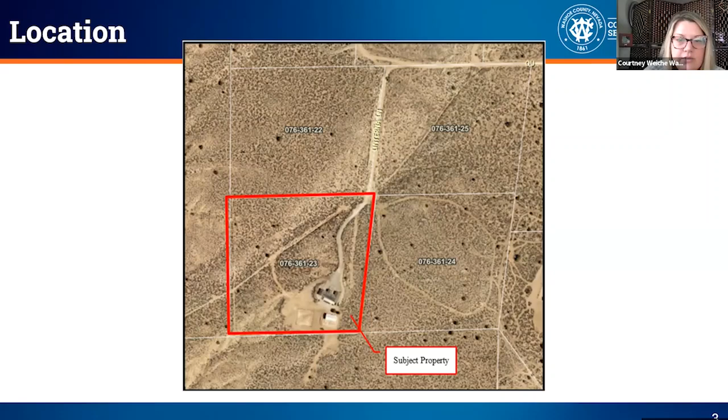The subject property is generally flat. Adjoining lots are developed with single-family dwellings and contain several similar accessory buildings. Existing and proposed development on the subject parcel is consistent with the development in the surrounding area. As shown on the site plan, the proposed location meets all applicable setbacks of the general rural regulatory zone and defensible space requirements. I actually already went over that, so I'll skip that part.

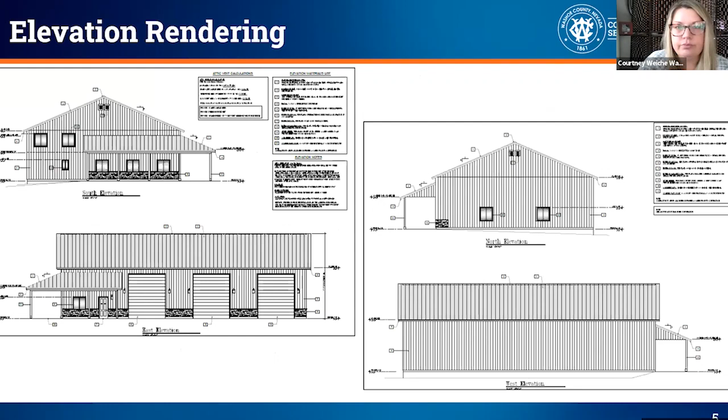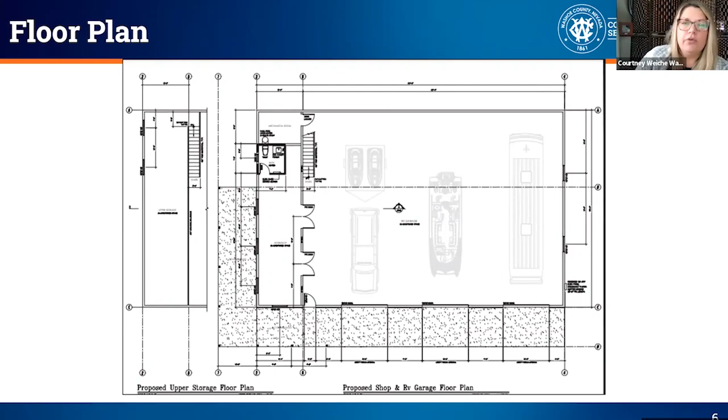The proposed structure will be stick built with metal siding and have stone veneer accents on the lower portion of the structure's perimeter. The metal siding is required to be non-reflective per condition 1F of the conditions of approval. The structure has a maximum height of 27 feet and is within the maximum height allowance. The floor plan includes a small covered patio, a mechanical room, half bathroom, an upper level mezzanine storage area, and a main floor for RV, boat, and storage space.

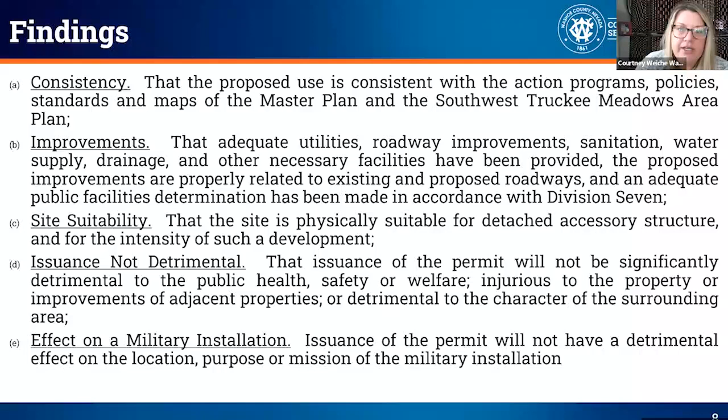All appropriate noticing was followed. 36 properties were notified of the application. No comments were received either for or in opposition. All applicable agencies also reviewed the request and provided no opposition. We only had one agency, Truckee Meadows Fire Protection District, that provided conditions of approval, which indicated that the structure must comply with all applicable fire codes. Staff believes all required findings for approval can be made, and I have provided a motion for your consideration. That concludes my presentation, and I am happy to answer any questions.

Thank you. Are there any questions for staff? Within the actual documentation, page 19, Exhibit B, attached is NRS 534-180, which states that approval for that use or purpose must be obtained from the local governing body or planning commission in whose jurisdiction the well is located. Does that mean this has to go before the planning commission, or can we handle it here? No, that's a statutory requirement, but typically the planning commission grants the authority to approve to the appropriate governing agency, so it would not need to go before the planning commission. Okay, thank you for clarifying that.

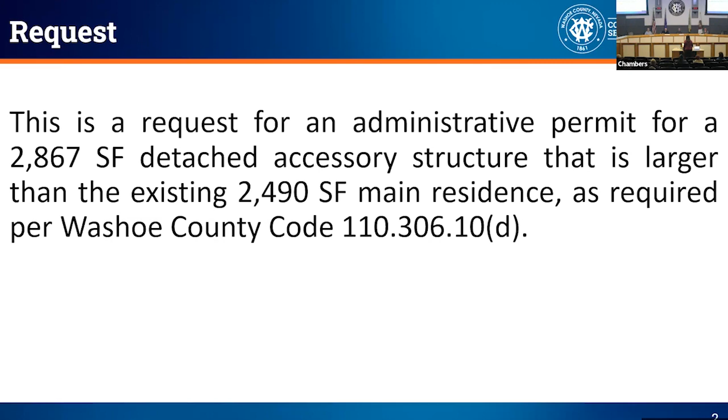So this is a request for administrative permit similar to the previous one you heard. This is for a 2,867 square foot detached accessory structure that's larger than the main structure, which is 2,490 square feet. And it's located out off of Red Rock Road. You can see where Red Rock Road is, and then you can see a closer view of the property.

So the parcel, as the previous one, is zoned GR, but it's only a 12-acre parcel, which makes it fall under the low density rural requirements. They have a setback of 30 feet in the front and rear, and 50 feet on the sides. The structure will meet that.

Also, the structure is only going to be 18 feet and 7.5 inches, which meets the height requirement of LDR. And then concerning the lot coverage, it will meet the requirement, which is either 80,000 square feet or 10% of the lot, so it's going to be considerably under that.

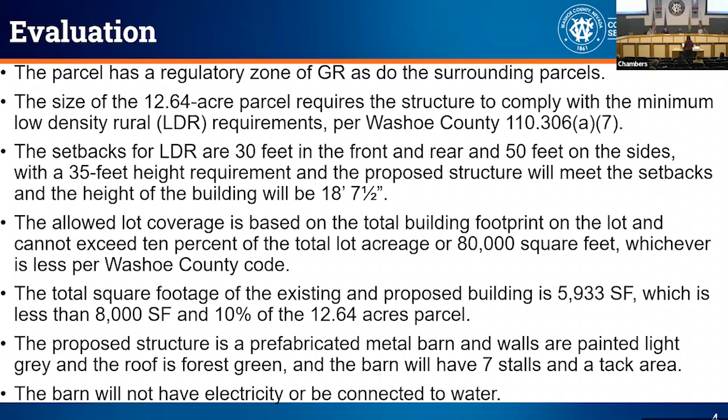The proposed structure is a prefab metal barn. The walls will be painted light gray and the roof is forest green. The barn will have 7 stalls and a tack area. The barn will not have electricity or be connected to water.

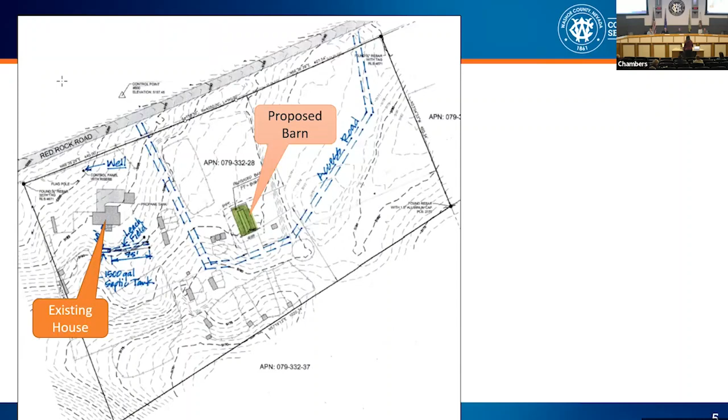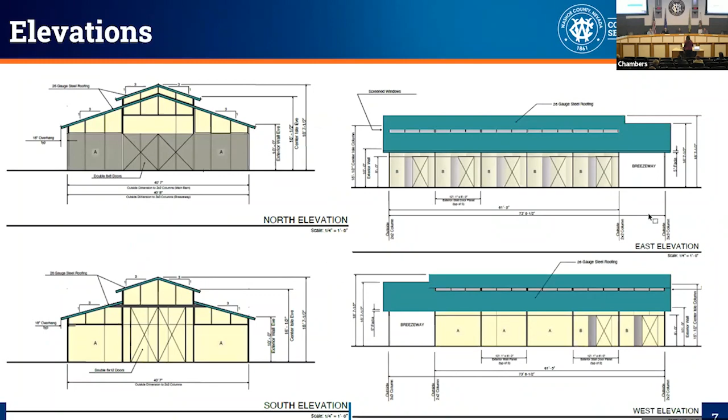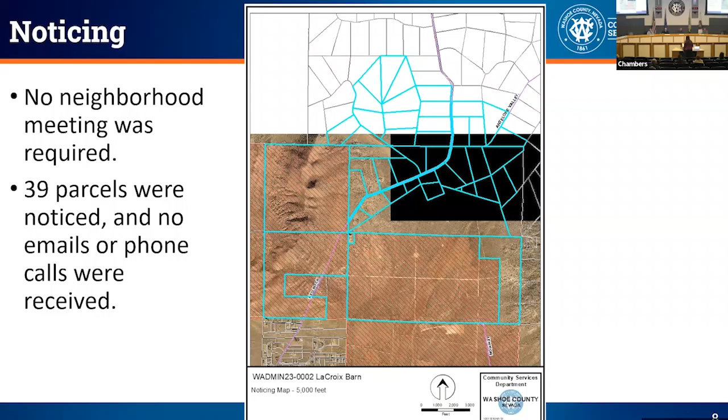There was no neighborhood meeting required. 39 parcels were noticed, and I didn't receive any phone calls or emails. This was routed to various departments and agencies, and those comments are included in your conditions of approval. Staff is able to make all the findings, and I provide a possible motion, and I'm available for any questions.

Thank you. Is there any questions for staff?

Mr. Stanley: Mr. Chair, Planner Olander, I'm going to ask the same question that was asked by one of the neighbors earlier and that we asked the last applicant as well. Do we know whether this is a private or commercial endeavor, or any contemplation of it becoming commercial? Staff: At this point, as far as they've presented, it's private. They are only to house their own horses on the property.

Thank you. Are there any more questions for staff? Commissioner: Mr. Chair, I have one question for Ms. Olander. Were there any comments or objections posed by the neighbors when they were sent their mailing? Staff: I did not receive any emails or phone calls. Very good, thank you.

Ms. Julian: I have a query. I think the table on page 7 needs to be updated for the actual comments, because I believe there are conditions from the environmental health agency that are not reflected there. Can you look into that? I don't see any X's there, but they did respond with some conditions.

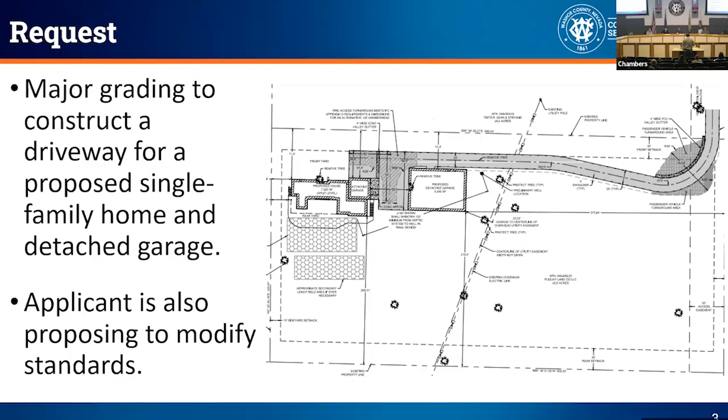Before you is provided a site map. The request is for major grading to construct a driveway for a proposed single family home and detached garage. The applicant, as part of the request, is requesting to modify a single grading standard. I want to highlight 2 things associated with this site plan. To the far right along the property line where the driveway starts, they've provided a decent amount of turnaround space, acting almost like a cul-de-sac type turnaround for anybody who comes down that driveway.

The additional item is between the proposed residence and the proposed detached garage. They are providing a large paved area that is part of fire's required conditions. And so I want to note those specifically because it does impact the proposed grading and the proposed design.

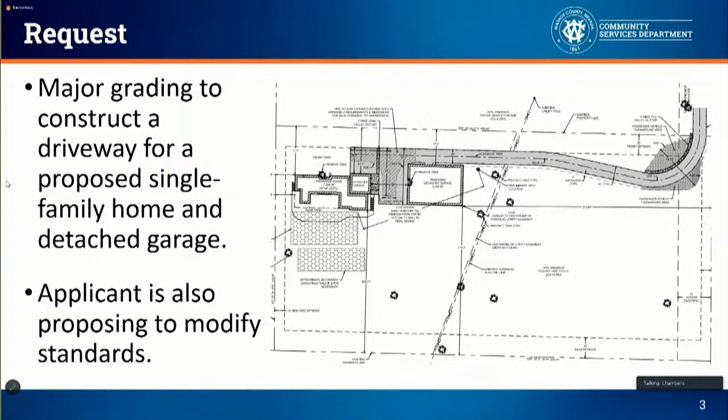So the request associated with it, the 3 triggers are the importation of 1,000 cubic yards on sites that are 15% or greater in slope, a driveway that traverses 30% or greater slope, and then grading to construct a permanent earthen structure greater than 4.5 feet within the front yard setback. The overall quantities that were proposed are 970 cubic yards of cut, 1,250 cubic yards of fill, with 1.75 acres of disturbance.

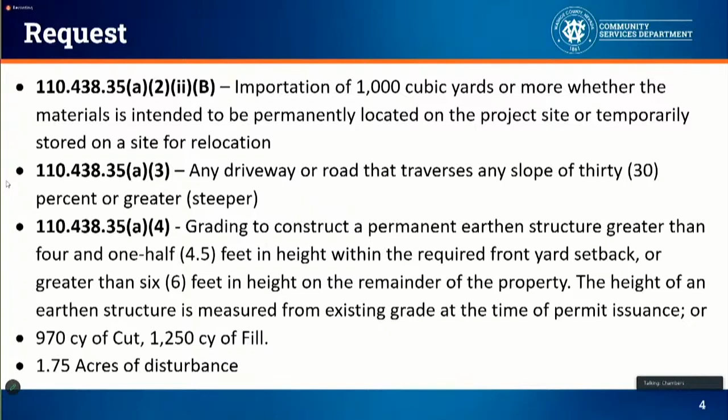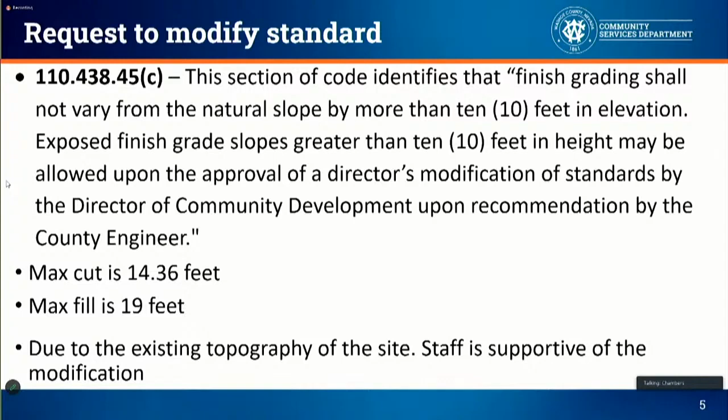The request to modify a standard is specific to 438-45C. This is relatively common to see requested to be modified. The code limits the max difference from natural slope to be no greater than 10 feet. In this case, the max cut that they are proposing is 14.3 feet and the max fill is 19 feet. Due to the existing topography of the site, staff does support this requested modification.

Staff did go to the site for a site visit last year, and upon going to the site, it was witnessed that the applicant had conducted unpermitted grading. So the unpermitted grading, as you can see, is in the outline above the dashed lines and the primary driveway cut. The original intent and the reason why this unpermitted grading took place was for the applicant, the property owner, to conduct perc tests and leach field trench tests. While the grading associated with the leach field test and the perc test is exempt under Article 438, the grading to get access to this location is not.

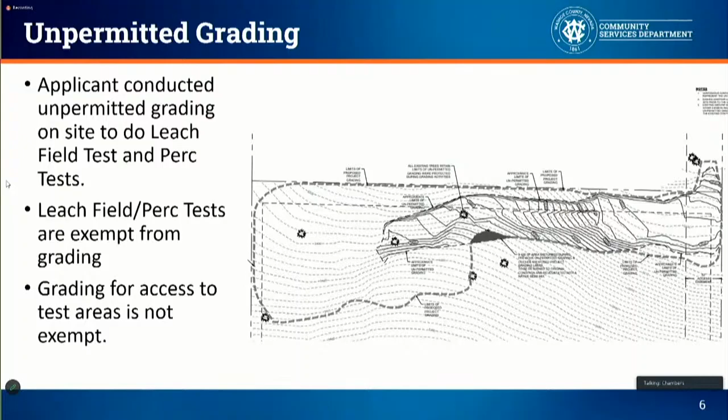When staff found out about the unpermitted grading, we requested the applicant go back, modify their request, address the unpermitted grading, add the additional cut and fill that they did, and resubmit. The applicant did exactly that, but I want to note that while the grading originally was unpermitted, it did ultimately follow the proposed driveway that is before you. So part of this grading permit is to also rectify that unpermitted grading.

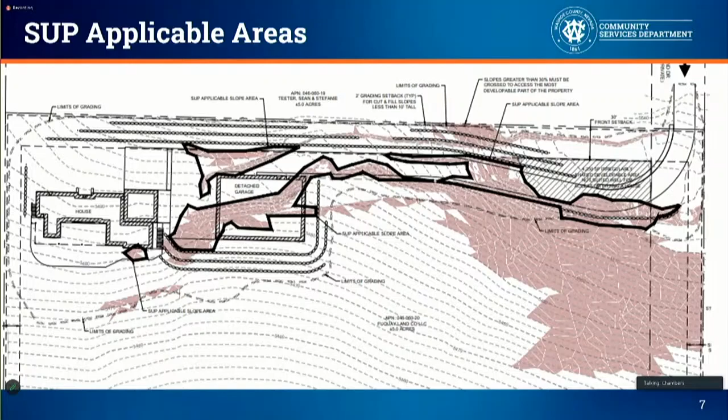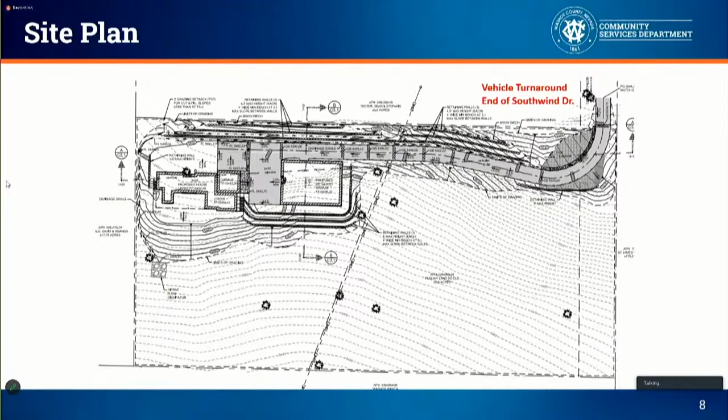Within the South Valleys area plan, there is a specific area plan policy that is required to meet all the findings for a special use permit approval. And that finding is specifically South Valleys 2.16, which states that there must be a finding included that the community character, as described in the character statement, can be adequately conserved through mitigation of any identified potential negative impacts.

Through the analysis of the application that was submitted, as well as the conditions of approval that were provided by the various agencies that review this, staff is confident that we can make this finding. Staff is recommending approval with conditions. A motion can be found on page 10 of your staff report, and I've also provided a motion above for you. I'm available for any questions you may have.

Thank you. Are there any questions for staff? Mr. Stanley. Oh, thank you. I'm sorry. For the record, Don Christensen. Would it be safe to say that, well, let me back up. This board is always interested in pre-existing unpermitted violations, if you will, though we're not an enforcement board.

But the point being, would it be safe to say, in your opinion as the planner and your staff, that the plan for the finished product of this grading, though it exceeds the normal standards for grade slope and whatnot, sufficiently, I hate to use the word covers the sins, but sufficiently mitigates the work that was unpermitted, and that this is an improvement overall in the grading plan?

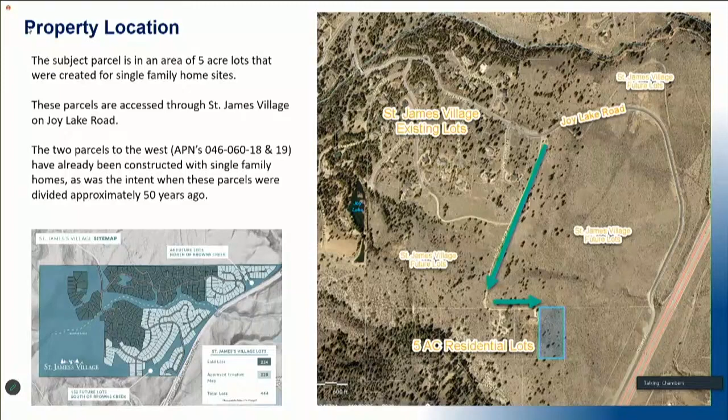They'll get there, but what will happen is there will be lots that actually come right down to the north property line of these 5-acre lots that are in St. James Village. This is just the recorded map that shows the 50-foot easement that comes down through St. James Village. Zoning and master plan, Chris went through. We're rural in the master plan and general rural in the zoning. These 5-acre lots are basically grandfathered in. Typically, you'd have a 40-acre lot size in GR.

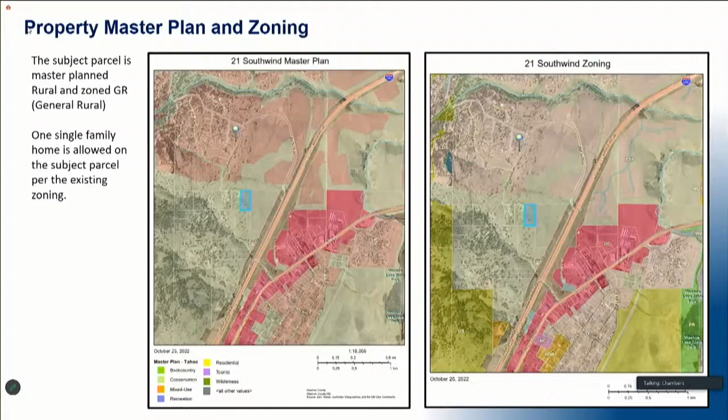These have been, best I could find, created in the early 70s. So they've been there for quite some time, predating the current zoning on the properties.

The site will be visible from I-580 and Joy Lake Road as well, but because of the contour and terrain that goes up, you'll be able to see only a limited amount of the grading. We do have a series of walls—you might catch a glimpse of some of those—but those are just to deal with the steep slopes on the property.

Practically, you can't go straight down that 30% or steeper slope. The red areas on that map are 30%, so driving straight down that easement, you're not going to be able to create legal access to the property. In all likelihood, they need to work something and kind of zigzag or serpentine it through there to work better with the grades. I'd anticipate the owner of the property will have no problem working with them. That's not a developed area of the property at all, and it's not intended to be developed. If the adjacent property owner needed that, I wouldn't see any reason why it couldn't be accommodated.

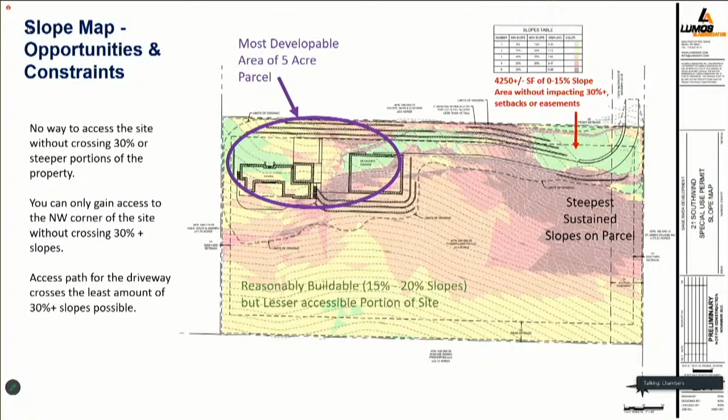So Chris put this map up. I want to illustrate that the darker colored grade lines reflect the grading that was done—the unpermitted grading. What happened was, Lumos and I, neither of us knew this had occurred before, went out to the site with Chris, and he looked at it and said, oh, there's some work that's been done. He determined that yes, this did in fact exceed special use permit requirements, and required that we go out and get the contours for what's there. We didn't have those, and thankfully we got out there right before one of our storms hit, because the site's been covered with snow, a lot of snow, for quite some time at this point.

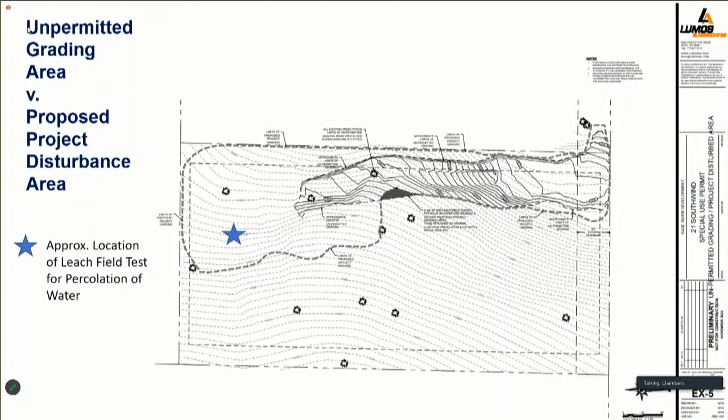That smaller area inside with the darker lines is where the unpermitted grading happened. You can see at a point it stops, and down about here is where the leach field testing was. Once they got down there, they were able to follow the contour lines and drive over some of the vegetation easily, but they had to get down that 30% or steeper slope, which constituted a lot of the grading.

There was a comment earlier, I can't recall if it was from a board member or from Chris, about jumping the gun. Yes, in fact they jumped the gun. The fortunate part in this case, and I don't always have cases like this, I've represented a lot of things that happened without permission in the past, is that this did follow where we were going to be grading anyway.

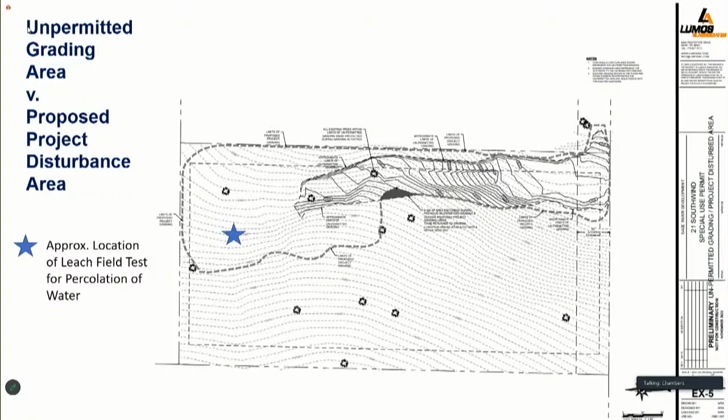There's only a very little part that we're actually going to bring back. That dark area there, kind of a half circle or half oval, that's the part that got graded that we'll bring back to natural. There's a tree right up in that area we're going to end up saving out of this, so we don't need to keep that grading and that dirt that was sloughed off. We'll pull that back.

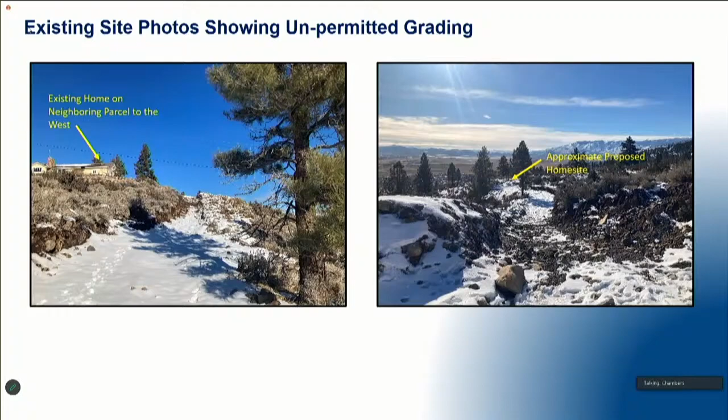You see how that little knoll comes out? That's the best developable spot on the property for a variety of reasons. In the left-hand picture I'm not all the way at the house site, it's even a little bit farther down the hill from me. But you can see the grade separation, which confirms no view blockage. There is quite a bit of grade separation from where the house will be located to the existing house.

Chris showed this map and went over it. These are the 30% or steeper areas that are applicable. You can see in our drive line that we go across the fewest portions of 30% or steeper slope. We actually follow the contours a little bit better through that area, which is what makes putting the driveway there the best choice. I think that may help answer one of the earlier questions.

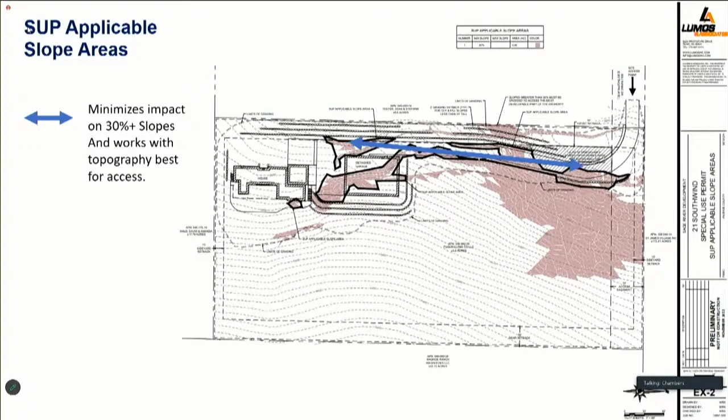This is our overall cut and fill map. Part of our request is for cuts and fills in excess of 10 feet. The purple area is the area of fill in excess of 10 feet. There's a little reddish-orangish area up off the driveway on the western side, at the top, that's our cut area in excess of 10 feet.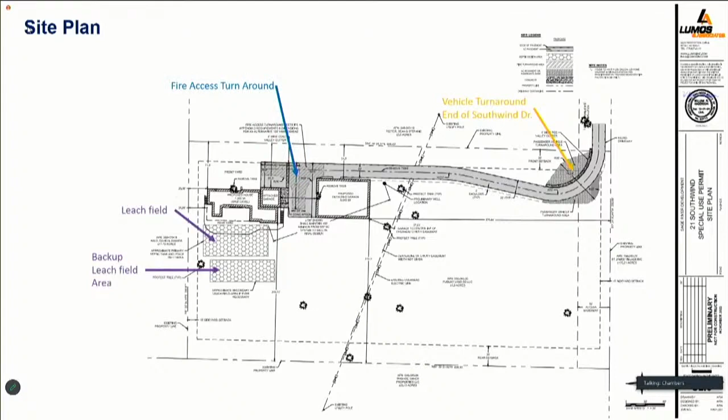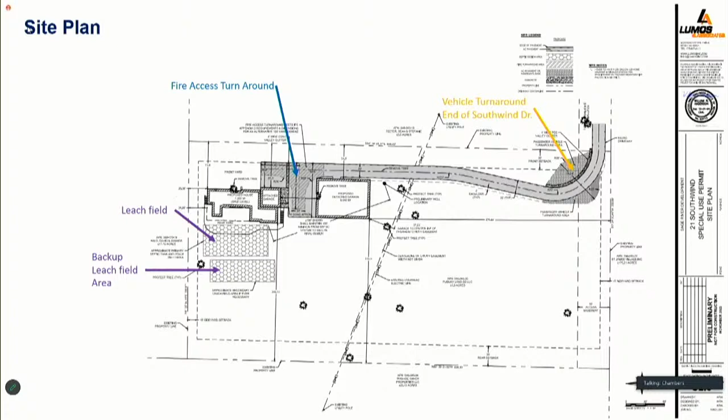What's required with the leach field is that you propose where your first leach field area is going to be, but you also identify where a backup leach field would be if your first leach fields were to fail. So we've got that backup leach field area identified. It's not shown as being graded, it would only be graded if their leach field ever failed. Those are identified on the site plan, and I'm going to make sure we called those out.

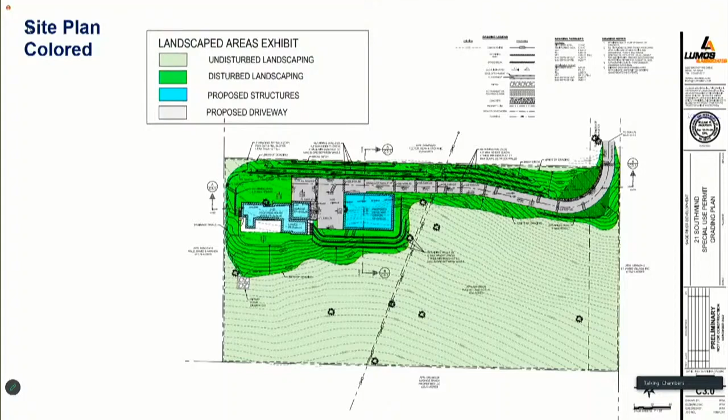This is a site plan that shows the house with the funky contours around it, and then we have a garage, a single-level garage off to the north side. This shows the areas that will be graded and revegetated. All the light green areas are going to exist as natural vegetation, which is a predominance of this 5-acre site. The total disturbed area of the site was equivalent to 1.75 acres out of the total 5-acre parcel, so not even half of the site will be graded, and we're trying to minimize that as much as possible.

And with that, I will close my presentation and be available for any questions. The one thing I would like to point out on the leach field testing, it's a very important part of your consideration for development and what you're going to face. All I can do is stand here and apologize on behalf of the owner of the property. They didn't realize, and whoever did that testing didn't realize that they were crossing a threshold. That is incorporated into our overall grading. We went out and did extra topo work to make sure that we captured that appropriately in this application. I'm available for any questions you may have.

Thank you. Is there any questions for this gentleman? Mr. Chair. Mr. Stanley? Thank you.

Mr. Snellgrove, the question was raised in one of our advisory inputs about how many trees would be lost and how many will be replaced. Can you talk to that? Let me see if any of the maps have the tree locations on it in full. Billy Anderson should be online on the Zoom call if you can locate him, he's the engineer on the project. There's Billy. Billy Anderson with Lumos and Associates, for the record. There'll be 3 trees lost due to the grading.

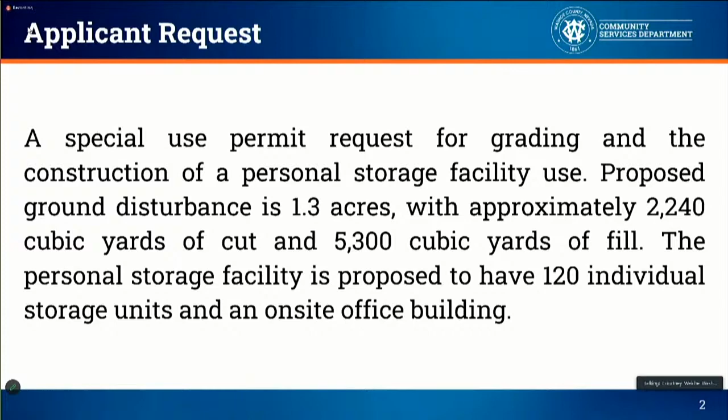The subject parcel is located currently at 0 Reno Park Boulevard. My understanding is that they will have to get a permanent street address after this, on the west side of North Virginia Street in the Cold Springs area plan. The parcel is 5.35 acres in size.

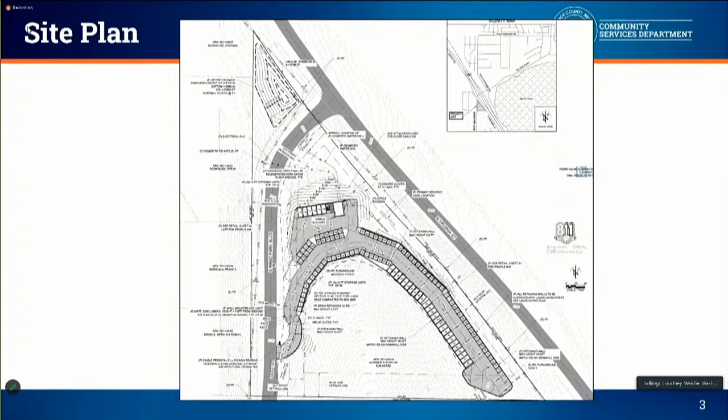There are 3 designated regulatory zones, and it may be difficult to see on the overhead there, but it was included also in the staff report. I tried to delineate using colors which portions of the site belong to each regulatory zone. The parcel has 24%, or 1.28 acres, of public semi-public facilities, 42%, or 2.25 acres, of neighborhood commercial regulatory zone, and 34%, or 1.82 acres, of general rural.

The area outlined in blue represents the public, semi-public facilities that predominantly follows Reno Park Boulevard. The area outlined in green represents the general rural, towards the south end of the parcel with the steeper slopes. The area outlined in red represents neighborhood commercial.

The proposed setbacks and uses on each of the pertinent regulatory zones are complied with. Personal storage is prohibited in the general rural and public semi-public facilities regulatory zone. None of the proposed storage units will be located on the general rural or public semi-public facilities portion of the parcel. All structures with the personal storage use will be located solely within the neighborhood commercial regulatory zones, the area highlighted there in red.

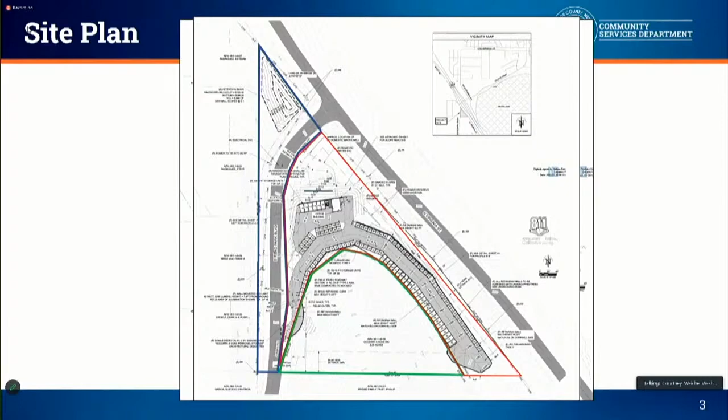Grading for vehicular access and parking will take place on some portion of all of the regulatory zones. The property would be served by South Reno Park Boulevard, which is accessed by North Virginia Street. South Reno Park Boulevard bisects the western parcel line of the subject parcel.

I did request of the applicant to provide additional information on materials and colors for the proposed storage units. This is actually owned by the same owner, Goodwin's General Store, and the applicant indicated that they plan to do similar colors and materials, specifically matching the roof eave of the above picture. Below is also a rendering of the elevations.

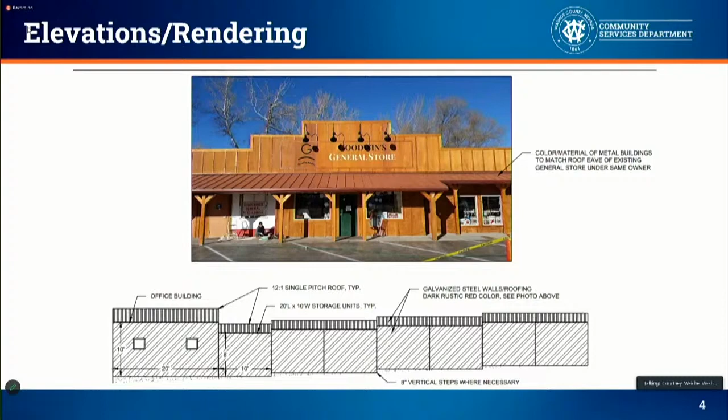We'll talk a little bit about staff's analysis and compliance with the various applicable articles. Article 410 directs the use for the required parking, which would be 10 spaces with one handicapped accessible space. The applicant has provided dedicated striped parking for 3 spaces and 1 handicapped accessible space. In addition, there will be approximately 41 additional unstriped parallel parking spaces in front of the storage units proposed for loading, which is similar to what you find in these type of storage facilities.

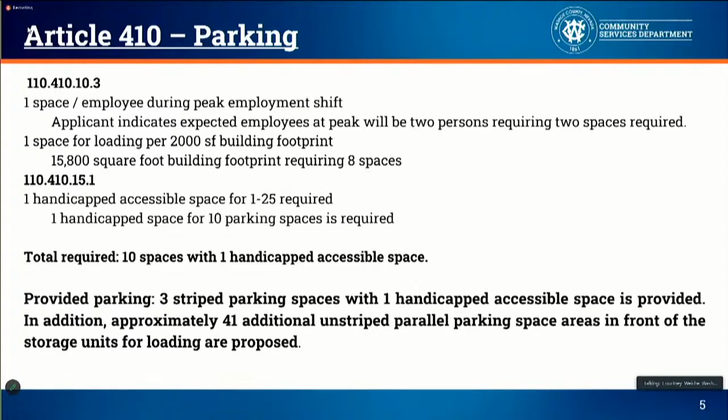Article 412, landscaping, requires that 20% of the developed area be landscaped. The landscaping plan proposes 15,500 square feet of landscaping; only 13,000 square feet is required based on the developed area of 65,000 square feet. The landscaped areas include buffer areas, streetscapes, parking lot edges, islands, and various planter beds throughout the parcel. The landscape plan proposes a mixture of deciduous shade trees, flowering and/or deciduous trees, evergreen trees, and shrub plantings to be located along the perimeter that are visible to adjoining uses. As proposed, the landscape plan does meet the requirements of Article 412.

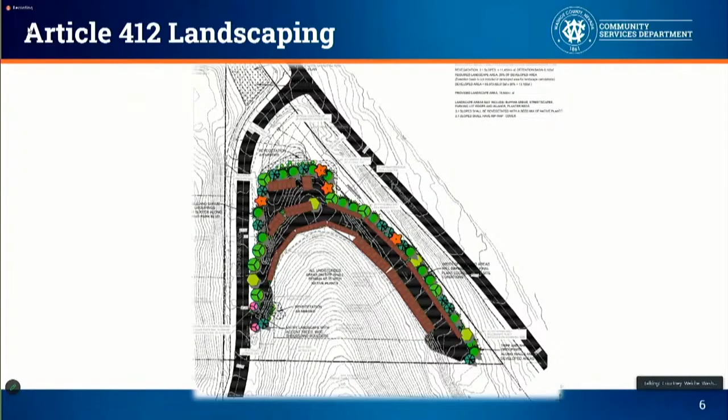Article 436, street design standards. The Washoe County Engineering and Capital Projects Division reviewed the proposed project and indicated that the existing Reno Park Boulevard, highlighted here in blue, is located within the subject parcel and has an existing easement width of approximately 80 feet, subject to verification, and is currently privately owned and maintained. They further noted that the roadway is severely deteriorated, requiring full reconstruction. Engineering has added conditions of approval to address the needed improvements to Reno Park Boulevard.

Article 438, grading. Buildout of the proposed development exceeds the major grading thresholds for traversing slopes greater than 30%, and fills in excess of 1,000 cubic yards for both cut and fill on slopes greater than 15%. The applicant indicates there will be approximately 1.33 acres of surface disturbance, 2,240 cubic yards of cut, 5,300 cubic yards of fill, and approximately 3,000 cubic yards of imported material. The earthwork summary includes the excavated volume of the entire detention basin located at the northernmost tip of the parcel.

The site plan generally avoids disturbance of the area designated general rural where the steepest slopes occur, shown in red on the overhead slide. There are no requests to vary any of the grading standards. The applicant has demonstrated extenuating circumstances that require grading on slopes over 30%.

The location of the personal storage use was designed to avoid the portions of the site with the steepest slopes to the extent possible. However, grading will be necessary along the internal driveway and for portions of the personal storage location. I provided a graphic overlaying the site plan with the slope to demonstrate that a majority, if not all, of the proposed storage uses are outside of those steepest slopes, to the extent possible. All grading is proposed to have a maximum of a 3-to-1 slope and will be revegetated with native plant species.

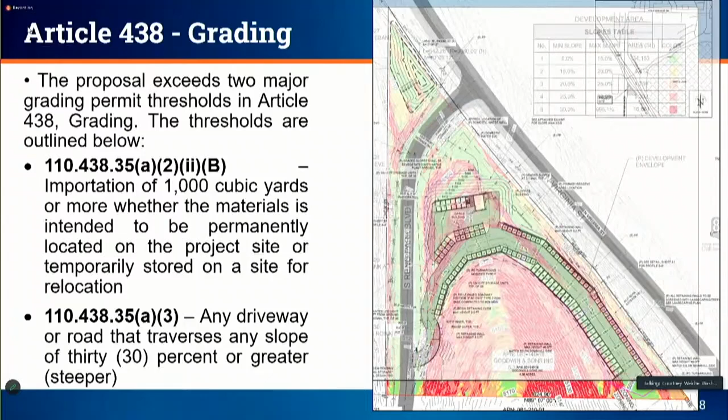38 properties were notified of the proposed application, within 1,000 feet, in order to get the minimum of 30 properties. No comments or phone calls were received either in support or opposition. All applicable agencies reviewed the request and also provided no opposition. Recommended conditions of approval have been incorporated appropriately as an exhibit to the staff report. Staff believes all required findings can be made, and I have provided a possible motion for your consideration. With that, that concludes my presentation, and I am happy to answer any questions.

Thank you. Is there any questions for staff? Yes, I have a question. I'm sorry, go ahead, Ms. Julian. Kathy Julian for the record.

Ms. Weiche, the reference to landscaping is noted in the staff report, but I don't see it included as a condition. Is there a reason why the reference to landscaping is not a condition in the document? I see a reference to the revegetation of the disturbed areas that have been graded, but not the other. I guess I look for consistency with staff reports on these items.

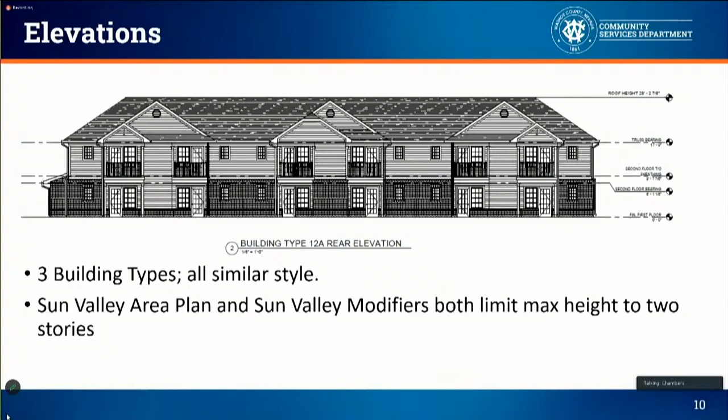So I provided some elevations. This is just one of the 3 building types that the applicant has proposed. The other elevations can be found within your staff report. It should be noted that the Sun Valley Area Plan and the Sun Valley modifiers within the Washoe County Development Code both limit the max height to 2 stories. The applicant is proposing 2-story buildings as part of this development. The max height of the tallest building, I believe, is 32 feet.

Before you are also elevations of the proposed clubhouse, as well as some of the concepts for the garages. We have a 4-bay and an 8-bay.

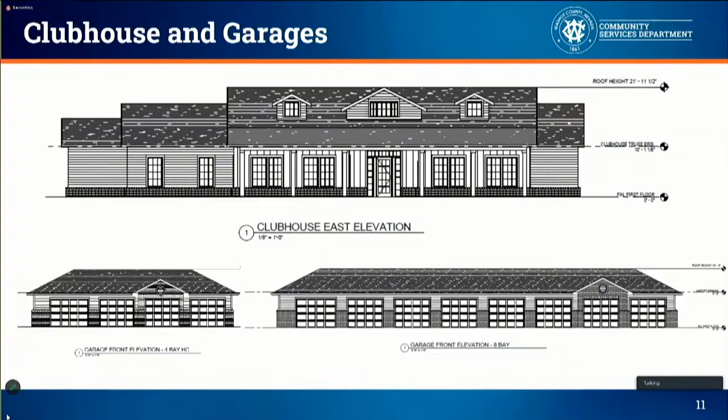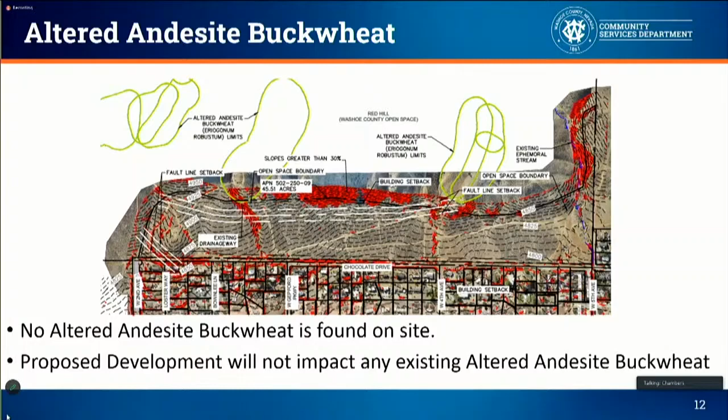This map shows where the locations currently are, the limits. However, there is currently no altered andesite buckwheat found on site. And as currently proposed, the development will not impact any existing altered andesite buckwheat populations.

So I want to talk about landscaping. This is an overall concept of the total site plan. Towards the bottom, you'll see those yellowish looking areas. Those are significant detention basins. So as this is on the bottom of a hill, the intent is to capture as much stormwater and retain it on site as possible. Those are code requirements to retain all that on site.

With the landscaping, they're proposing 3,270 shrubs as well as 545 trees. This is a requirement of code. The landscaping plan shows that they do meet this requirement. However, with the request for a modification with turf, they're requesting down to 21% of the total site being turf grass at 31,989 square feet.

Staff does support this due to our environment. We're a high desert climate. We do require that turf still be required as part of the common open space elements associated with the specific residence.

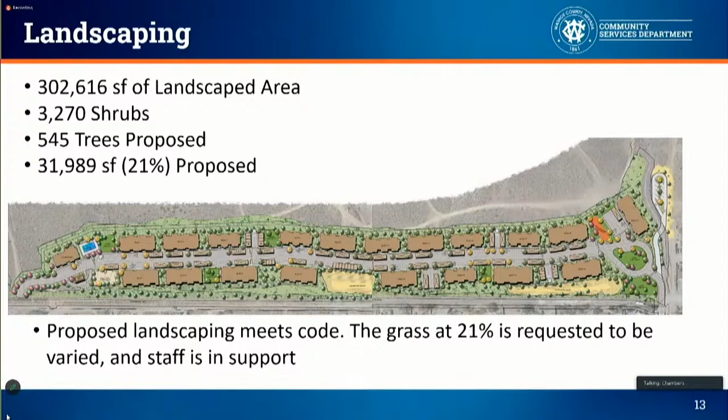So with the common open space, section 432 requires a minimum of 200 square feet of common open space per dwelling for developments of 12 units or more. With 240 units proposed, they're required to have 48,000 square feet of common open space. Now that all does not have to be grass, but that is a requirement to have large open grass areas as part of it.

With all the common open space elements that were provided as part of the proposed development, they are proposing 50,258 square feet of common open space. These elements can include courtyards, large lawn areas, turf, playgrounds, tennis courts, basketball courts, swimming pools, or similar outdoor recreation facilities.

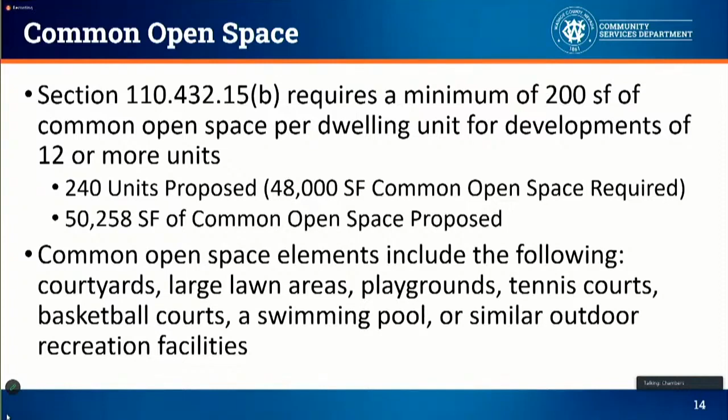There was a traffic study that was prepared by Kimley Horn. The traffic study did identify the following peak trips at full build out. What is currently anticipated is 96 a.m. peak hour trips and 122 p.m. peak hour trips. This application was sent to RTC and NDOT for review. No conditions or additional comments were received.

Parking is always an important topic when it comes to these types of developments. With this development, there's 468 parking spaces that are required. Applicant is proposing 470.

Of the amount of parking that is required, our code does require each dwelling have a covered parking space. With 240 units, there are 240 covered parking spaces that are required. They are proposing 204 covered parking spaces with 36 garages, thus meeting that requirement. Additionally, they're proposing 28 accessible parking spaces, with 18 of those being van accessible.

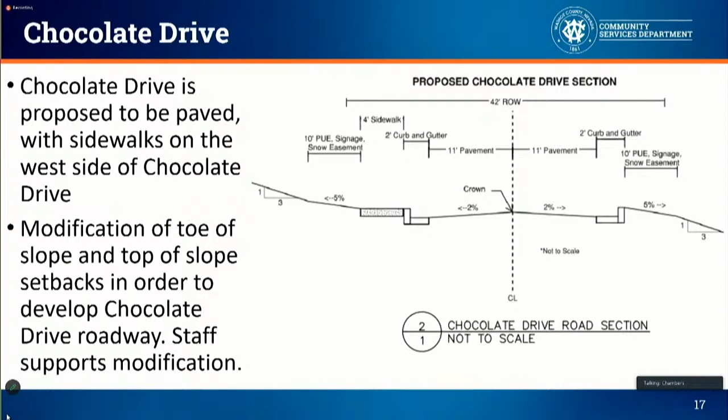Additionally, as part of this development, we're looking at seeing a Washoe County trailhead as part of the proposal. As submitted, there are 8 parking spaces within this trailhead. The trailhead is located at the northern end of this project site and will allow direct access to Red Hill open space. This trailhead specifically encompasses roughly 4.87 acres, and the intention stated by the developer is to dedicate it to Washoe County.

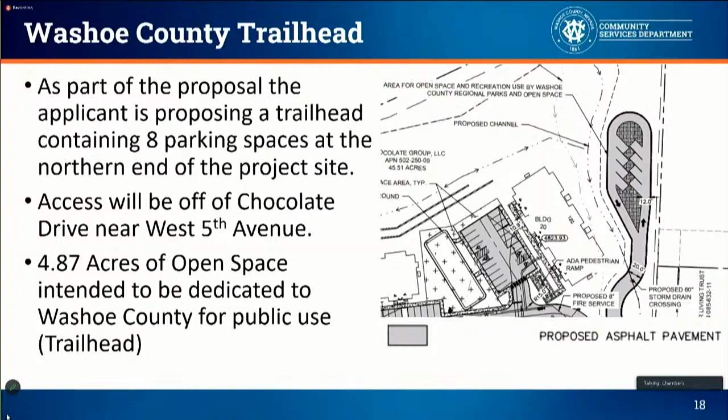You all should have gotten an email earlier today about a potentially amended motion and an amended condition. Before you on this slide is the proposed amended condition. Staff would like to see the following condition placed under planning's direct conditions, which states that the proposed trailhead shall be completed per the approved construction improvement drawings prior to the issuance of the certificate of occupancy of the first multifamily building to the satisfaction of the Community Services Department Director of Operations.

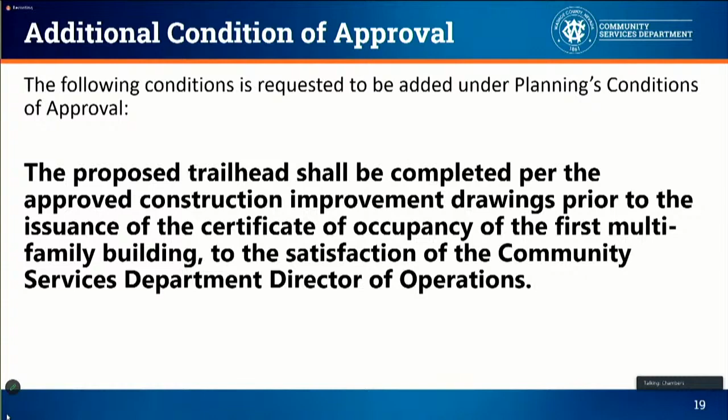The applicants did hold a neighborhood meeting on October 19th, 2022. It was held from 5:30 to 7:30 p.m. The applicant stated that there were 14 signatures within the document that was provided to staff. However, they noted that there was a total of 18 neighbors in attendance. There were also 4 comment cards submitted as part of that packet, and the concerns from the public related to traffic, water, stormwater, school impacts, noise, light pollution, flooding, as well as the Chocolate Drive paving.

Staff is recommending approval with conditions of both the special use permit as well as the administrative permit. The motions can be found on page 32 and 33 of the staff report. As mentioned, it was asked that you receive an amended copy of those directly to you.

I also want to mention that we do have additional staff presenters to assist with this project. One is the Director of Engineering and Capital Projects, Dwayne Smith, who has additional information related to Chocolate Drive's placement as well as the construction process. Additionally, we have Parks Planner Faye-Marie Pekar, who is able to provide any additional information related to the altered andesite buckwheat, the proposed trailhead, as well as any questions potentially from the board in relation to the Washoe Storey Conservation District's comments. Dwayne?

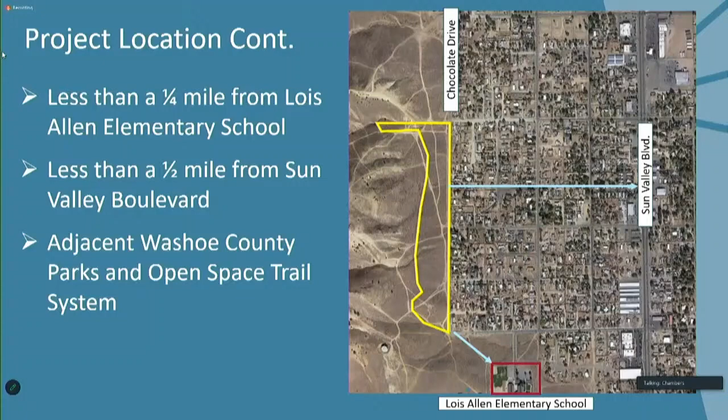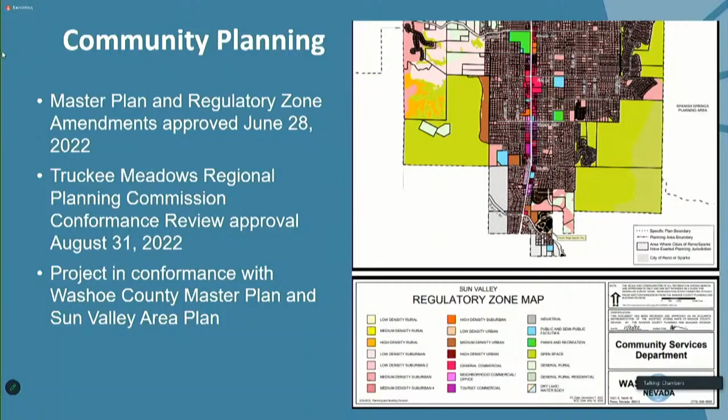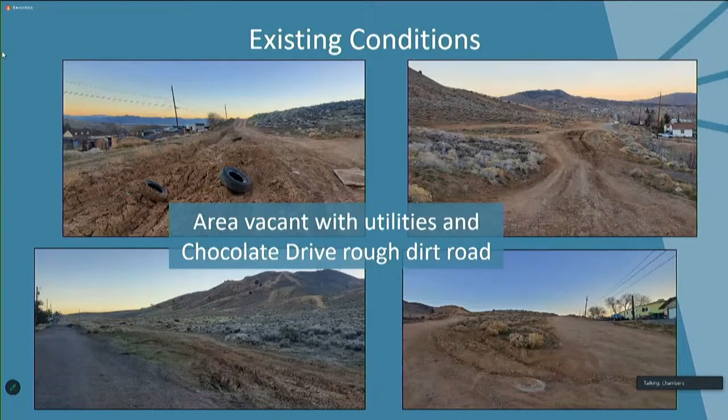So the project request today, so we've already gone through the zoning request before. The project request today is this administrative permit to allow for the residential component, and then a special use permit for the major grading. If you've been out there, there are some terrain challenges, as most land that's available in Reno has, or in the Reno metro area in Washoe County. And so this one's not unique in that nature. It does have some terrain that we're working with. So the proposed project, here's some more renderings. There are 240 units. Maximum height 32 feet.

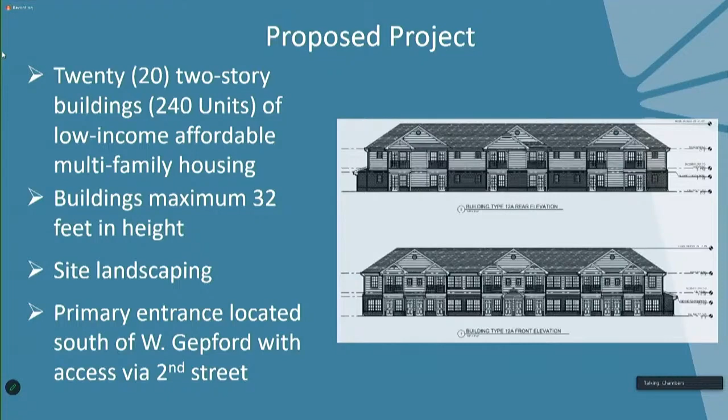So in your staff application packet, one of the things that we looked at was view sheds, and we were asked to review what this view shed would look like. These are 2-story multifamily residential structures. They're not 4-story, 5-story. They're 2-story capped at 32 feet. So those view sheds that are in your packet kind of display what you would see as you're coming away from the development and you look back towards the open space, and you'll see the limited amount that you can actually see of this project from those vantage points. There is going to be a considerable amount of site landscaping around this project to kind of dress up the impervious areas, the parking, everything else around it. And again, some of those primary entrances we already talked about a little bit with Second Street.

So the proposed project, I'll kind of get into a little bit on a rendered plan here, kind of give you a visual of the project a little bit more, but it does have several amenities in and around the project itself. We'll center in around the trail access. I think that's an important amenity on the north side of the project. And then there is common open space in and around the project. It does meet the parking requirements that the county has asked us to meet. 468 spaces were required. We're providing 470 spaces.

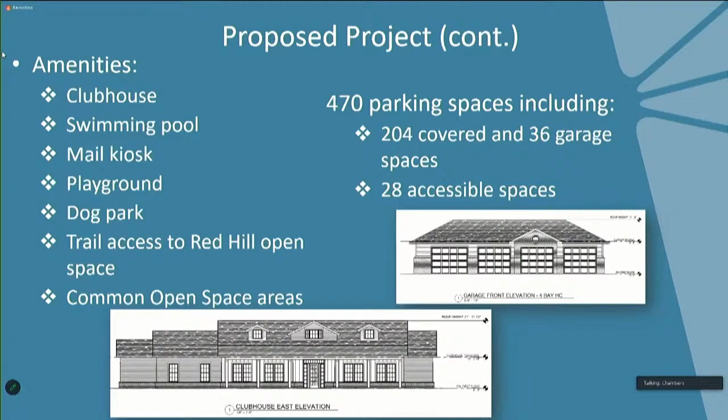And then there's a completely separate public road, which is Chocolate Drive. So the main traffic, the circulation of people maneuvering their vehicles to get in and out of their residences, is going to happen within the development. It will not happen on Chocolate Drive. Chocolate Drive is intended to be a major improvement for emergency access. It's going to be better for waste management, and in general better for the public as well.

It will be maintained by the county, so it'll be cleared in times like right now when there's a considerable amount of snow, and access will be maintained. And then on site, this is kind of a separate deal—that's going to be maintained by this development, and they'll have full-time management staff on hand.

So you can tell there's a couple different amenities on the project, intended to give residents things within their development that they can go to. There's a pool, a clubhouse, some open space, a playground, sidewalks throughout it. It's ADA compliant, to the code that we have to meet.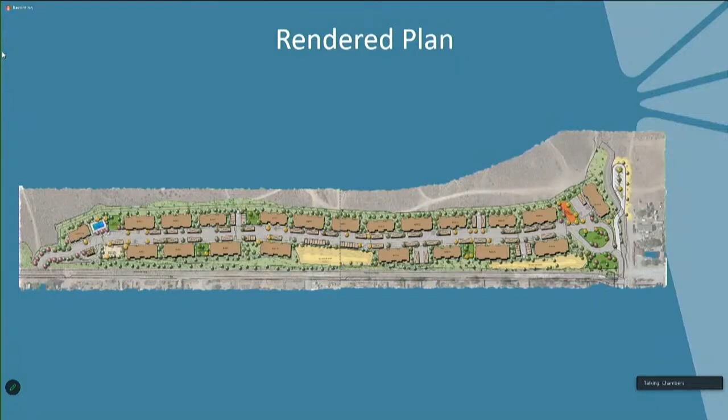On the south side of the project is the trailhead. This has been a topic of conversation for us, working with Washoe County, the Parks Department, and staff. That trailhead is part of this project on the south side, and there is access to it, with a considerable amount of grading required to make that happen, and some drainage we have to work through as well.

Here's a way less cool picture of the site plan, a little less color, but it does show in dark shading some of the roadways, especially how people will come in and out of this site—how residents will access it as well as the public. So you can see there are essentially two different avenues here: residents inside their development maneuvering within it, and then a separate, essentially public roadway.

An important part—the County engineer, Mr. Smith, mentioned this—is that we've been working with neighbors and had a neighborhood meeting, and one of the questions was on access. There are 18 driveways proposed off of this development to service each of those parcels to the east. Whether or not the grades work, or whether they want to connect to that road, is a different question, but we've made the provision to ensure there's a driveway connection and a curb cut in place, all along Chocolate Drive to service the residents to the east.

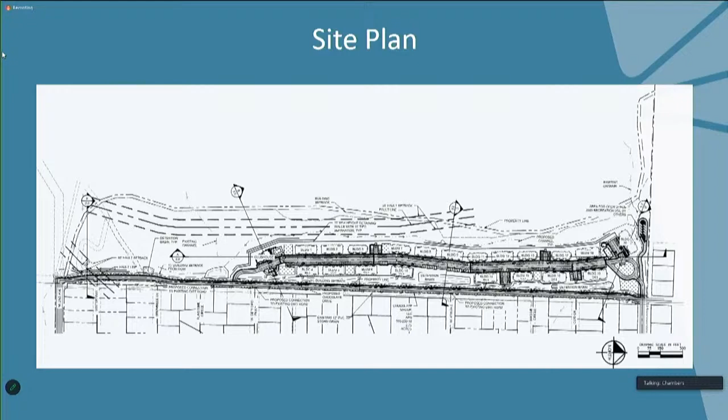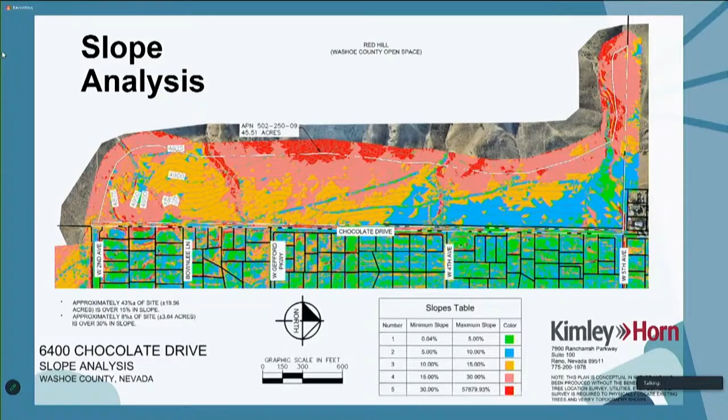Okay, so the slope analysis. This starts to tell the story of the hillside we're working with in terms of grading. The areas in red are significant grades—30% or greater—so that's a pretty steep slope. Most of our project avoids these areas; it's not very advantageous to anybody to try to grade any of that out. There are some pockets where we do touch it, but the majority of the project resides in lesser slopes. Still, it is a steep slope development.

Okay, so talking about community benefits. Affordable housing is obviously a big part of this project. The paved Chocolate Drive that we've talked a lot about today brings improved emergency services, waste management, and utilities.

There's also a water tank located on the south side of this project, so Sun Valley GID has improved access to maintain their facilities as part of this project. Dust control in general and access will be improved once it's paved. And that sidewalk system will connect this development to the nearby school and allow pedestrians to traverse that way.

So safer walkways. Another note brought up at the neighborhood meeting was security and what happens with management and how this will be maintained. There is full-time on-site property management that will be provided by this development.

The trailhead has been discussed at length today. You can see it here on the right side of the page - that has been provided by this project and is included in the project packet. That's established access where somebody can park and access the open space. It'll limit some of the dumping at various access points that are there today, and it'll centralize it a little more and make it easier for maintenance.

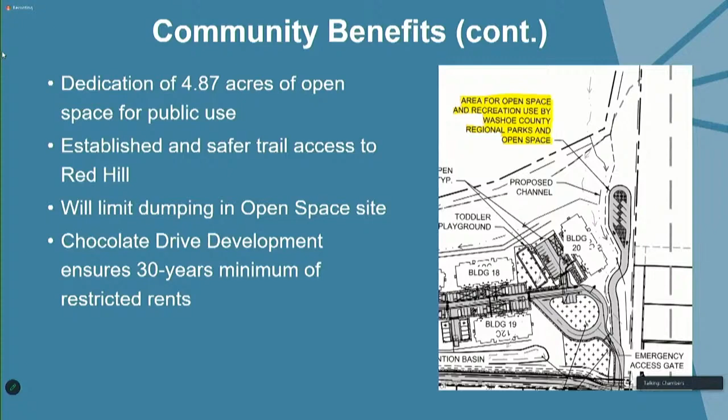And then a note at the end here is really about the restricted rents as it relates to the affordable aspect of this project. So, drainage.

This was brought up extensively during our discussion at the neighborhood meeting. There's a lot of unmitigated runoff that comes down from this development. We've had some pretty significant storms in northern Nevada this fall and winter. Right now we've got 350 acres of runoff that comes down this hillside right into where Chocolate Drive will reside, and today that runoff has nowhere to go except to continue on into the development.

With this project, Chocolate Drive will capture that runoff. We have a series of detention basins we have to build to meet the stormwater management requirements of Washoe County. But more importantly, it's going to convey that runoff, attenuate it, slow it down, and organize it more so it doesn't flow uncontrolled into the neighborhood.

So this is a significant improvement to drainage and a significant improvement to water quality. It'll allow us to control that runoff and put it where it's supposed to go, into ditches and storm drains and such, and we're working actively with staff on where some of that's going to go.

Several project meetings have happened on this project, including this one today, but we've also had a neighborhood meeting where there was a lot of good feedback from the community. We took a note of every item that was discussed and prepared a response to each of those items.

We've met with Regional Parks and had several conversations with Washoe County Engineering. This is obviously a complicated project in terms of infrastructure, as most projects are these days. We've had a couple of questions about access easements and how we're going to handle that, and we've proposed a way to build Chocolate Drive without having to go onto their property if they are not willing to provide the easement back.

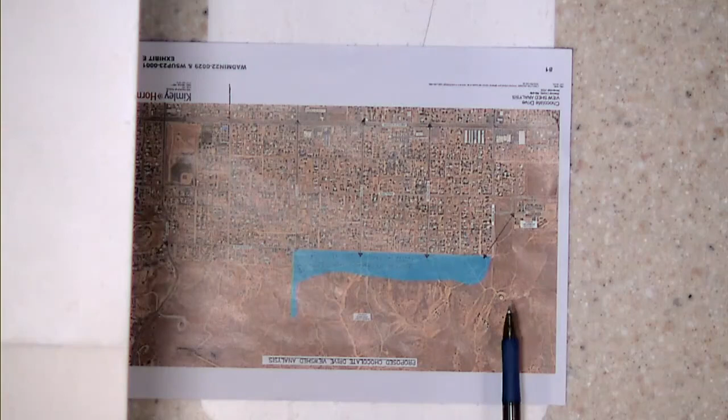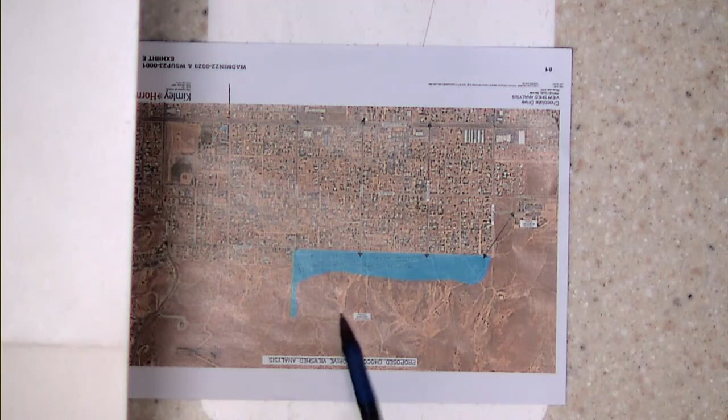As you can see here in the picture, this is the proposed development. Right down here is 2nd Street, and right here is where the elementary school is, and here's the existing water tank that's going to be servicing this and most of that neighborhood. As you can see through here, there's all kinds of trails, and the main runoff comes down. It's going to be coming down right through their main project.

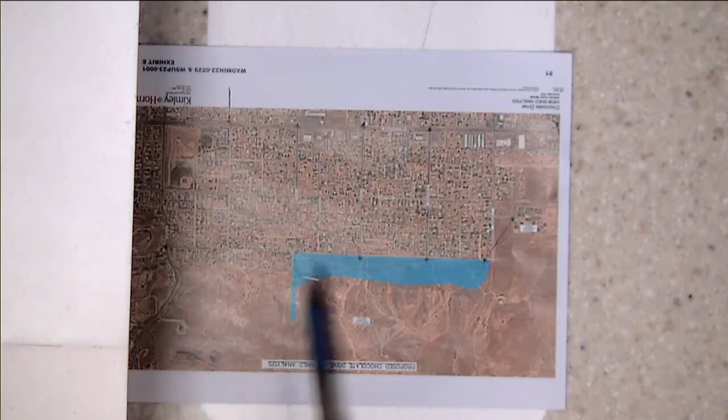As you can see also with their black arrows, they have one coming off of Chocolate Drive, where Chocolate Drive continues all the way to 7th Street. You have 5th Street, you have Gifford, 4th Street, and 2nd Street. 2nd Street, they're claiming, is going to be the only entrance because it's the only one that's paved all the way through.

This is what worries me with people walking to the bus stop and any of the children that need to go to Gepford Park to play baseball or anything else. Right here is where you're coming through and they're exiting. Their exit to this whole entire complex exits right into Gepford Parkway.

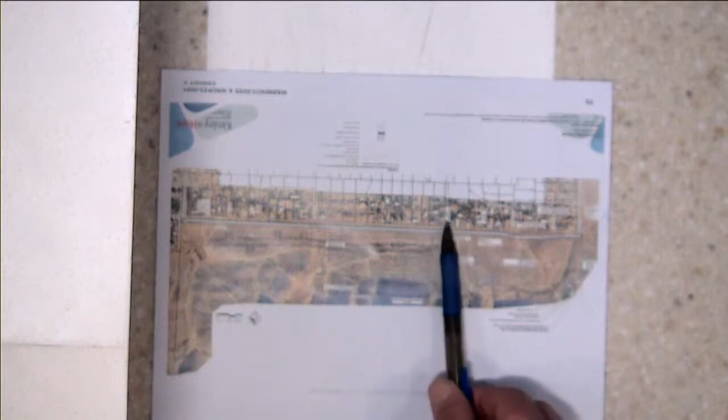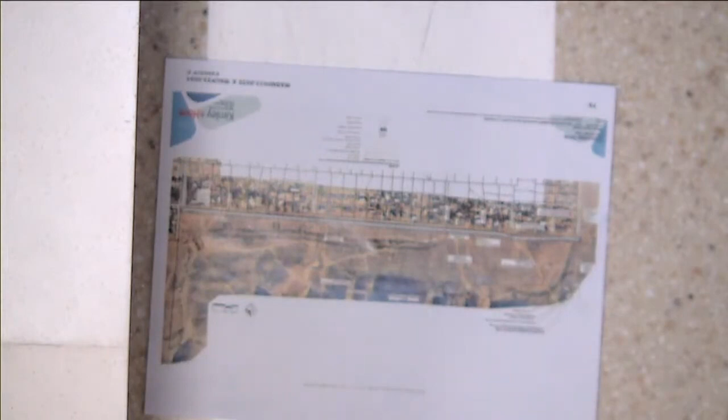Gepford Parkway is a little tiny dirt road right now. The only one that's actually wide and paved with sidewalks is 2nd Street. 4th Street, 5th Street are not paved, not very wide, and don't have any kind of sidewalk or access. So anybody leaving these apartment complexes and walking down any one of those streets to get to the bus stop on Sun Valley Drive is going to have a major problem, because if you got emergency vehicles coming up, you have to almost pull into the ditch as it is right now. Those roads are going to need to be improved.

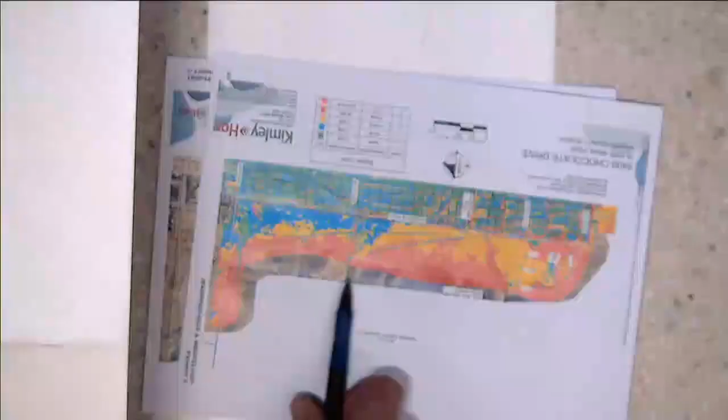And finally, on this one here, you can see where on the top of their color right here, the main runoff goes through all of those ditches. So all the main runoffs are already going to be going right into their apartment complex.

When they talk about traffic at 96 cars per AM and 122 cars per PM, but they're putting parking spots in for 470 cars. That's only 218 cars that they're talking about doing any traffic.

I don't know about you guys, but when I go to work and I come home from work, I generally go out again. So now you're talking about an extra trip, and they're talking about all of it just going on to 2nd Street. Sun Valley Drive as it is now in the morning backs all the way up to 4th Street. Do you think these cars are all going to just sit there and wait to get let in? They're going to be taking 4th Street and Gepford. They're not going to go all the way down to 5th Street and then try to go all the way around. So there need to be some infrastructure improvements, and badly, before this whole development takes place.

Thank you. Thank you.

There is no further public comment in chambers. Via Zoom, I have Kathy. If you could please unmute and state your first and last name for the record.

Hi, yes, I'm Kathy Simeon. I just want to ask, have any of you gone without having your garbage picked up for 5 weeks? I have. I have.

We don't have garbage picked up because Chocolate is a muddy mess. Waste Management comes out, and because it's a muddy mess, they put containers out on Gepford on 5th. And then people in Sun Valley put all of their trash in those containers. We can't put our trash in there. We can't get medical people to come out. I can't get utility people to come out. It's ridiculous, and I am all for this plan. Thank you very much.

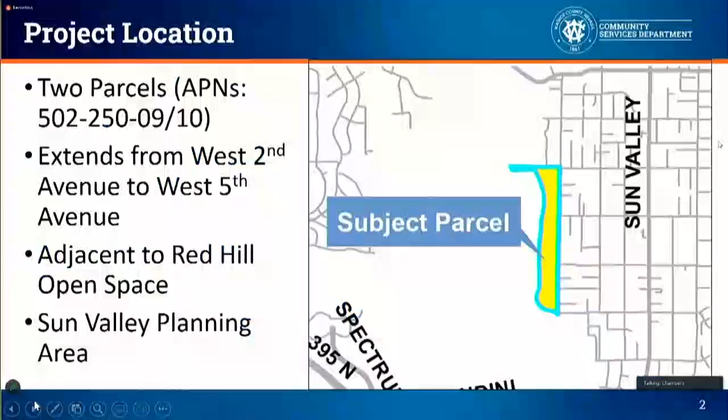I'm hoping you can see this on the overhead. To answer your question, the first part, will construction traffic be able to randomly drive anywhere they want? The answer is no. That's what a traffic control plan with a haul route, required for every project, will put in place. Have we had issues in the past where maybe one of the drivers wasn't aware of that? Yes. Will that occur on this project? I would guarantee you that something will happen, but at that point we have conversations with our contractor partners, with the developer, with those representatives to address those issues.

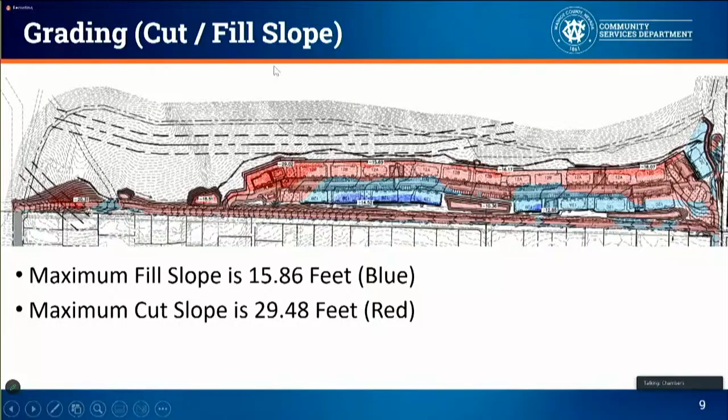No, Dwayne, just let us know which one, which slide. I've got my little tablet here. Oh, the doc cam, got it. That's the best we can do. Commissioner, I don't know if you can see that. Well, that helps a little bit.

So those are the roadways that are in our current inventory. Those are the roads that we repair, we clean the roadside ditches, we plow snow. We do all those things expected of the community because those roadways are built to Washoe County standards, so therefore we can accept them. The other dirt road areas in here are also access easements, just like Chocolate Drive is. So those are not part of this project.

And Commissioner Stanley, you asked me do I have any plans, or does Washoe County have any current plans, to do any paving through these areas. And like I said, no, but that doesn't mean we haven't and continue to look for grant opportunities and funding sources and other ways to make improvements to our communities. This is an area where we have a pretty good history, but there's a whole lot more we could do. I hope that helps answer your question, Commissioner. Thanks.